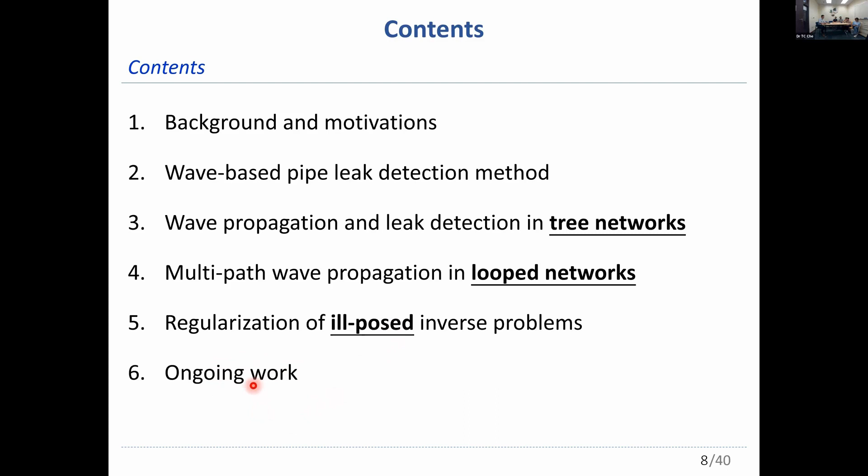Usually, in Hong Kong, the water pipes have been buried underground for several decades, or even more than 100 years. So aging is quite a severe problem of these water supply pipes.

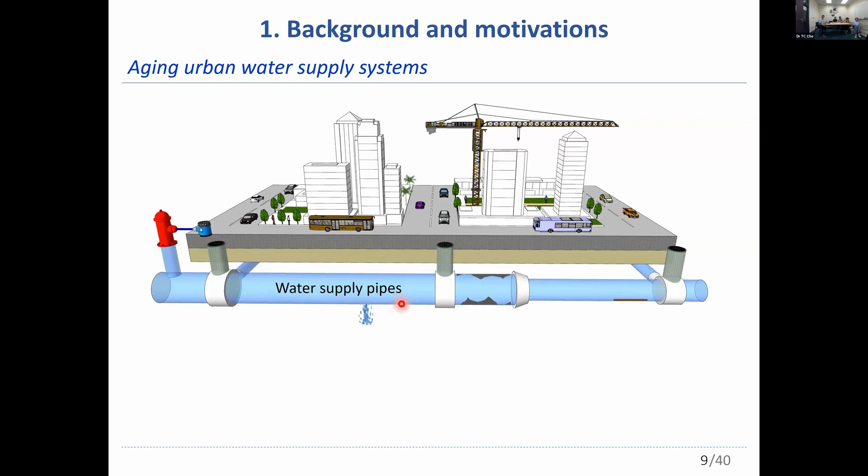So if we take a close look, they suffer from leaks. Each day, 30% of the water is lost from these leaking pipes. There's also deformation due to ground settlement, so our pipe may deform, and the shape of the cross-section area may change.

And also for the corrosion, especially for the metal pipes. And also, you can see here, we have blockages. But we focus more on the leaks.

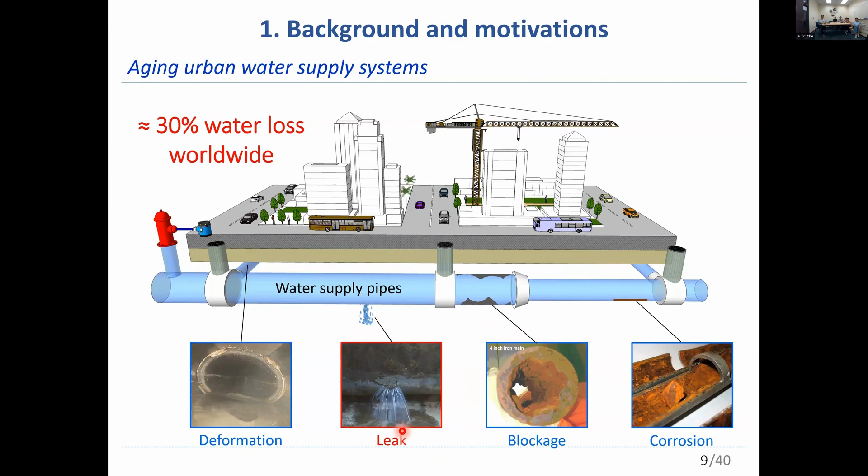Nowadays, there are many different methods for leak detection. A leak on the pipe can generate some hissing noise, like the sound.

So the idea of the listening stick is that the closer to the leak, the stronger noise will be heard by this guy, so that the leak can be localized when this guy hears a very strong noise. This is the idea of this listening stick. This method is very old, but very popular, because it is very easy to implement.

Actually, very similar for the smart ball. The smart ball is pretty much like a sensor that moves with the flow within the pipe. So you can see here, if we release the smart ball here, it can move with the flow and monitor the noise within the pipe.

So you can see here, the noise level is not that high. So when it reaches a leak here, you can see it has a very strong noise. Probably it moves forward. Here, some air bubbles also generate some noise, so you can see here the noise level is very high.

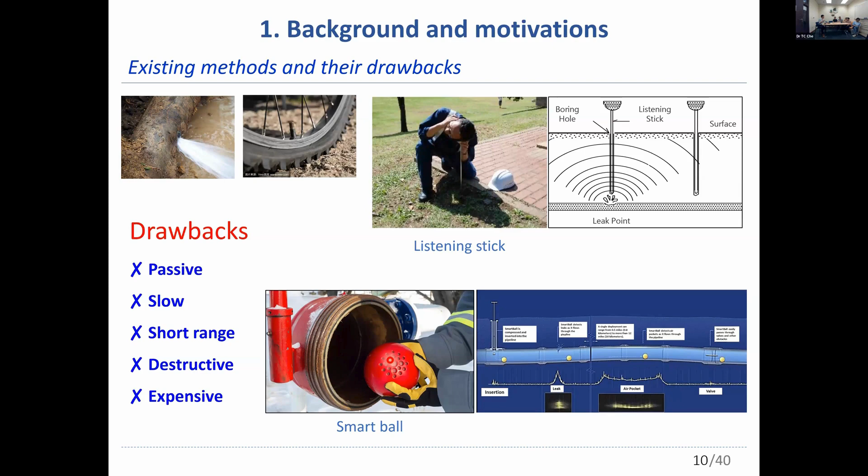So you know waves are all around us. You hear me because of acoustic waves, and our phone works with electromagnetic waves. In nature, animals are very smart, and if there is an unknown object like a moth during the night, or a fish in the deep ocean, they cannot see it, but they are very smart.

They usually send a wave, and they can get some reflection from these small animals. So they use the reflection waves to locate and identify the object. That's the idea. Probably I think here is an MP3. If you can hear, this is okay. Probably I need to change the pointer.

Here is the sound generated by this bat. You can see right here. This is a low frequency wave. This is a high frequency wave.

Actually, the animals are very smart. They generate waves at different frequencies. So you can see the sound generated by this dolphin for the low frequency wave. Higher frequency, even higher frequency.

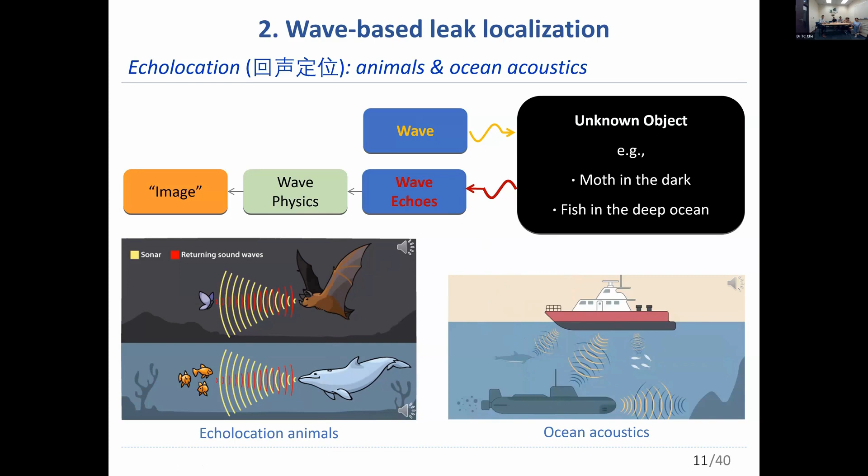That's the basic idea. The question is, can we do the same in pipe networks? The answer is yes, because we have the water hammer waves. Probably I can change the pointer here. Use a laser pointer, because we have the water hammer waves in our pipe system.

Actually, the water hammer wave is also one kind of acoustic wave. The wave speed is very high, it's like 1 kilometer per second.

So pretty much in this system, here is a reservoir. We transport the water to this valve by this pipe. If there is no leak in the pipe and we send a wave here, you can see the wave propagate and reflect at a boundary. We put a pressure sensor here to measure the pressure and we can measure this kind of signal. If we transfer this into the frequency domain, we get the frequency response function, and these are the resonant peaks of the system.

So if there is a leak, we still send a wave here. You can see the wave propagate and there will be additional reflections from the leak. We still measure here to get the time and frequency domain signals, and you can see it's very different from the no-leak case. Based on the measured signal, people develop different algorithms to find out where the leak is and how big it is. That's the general idea of this method.

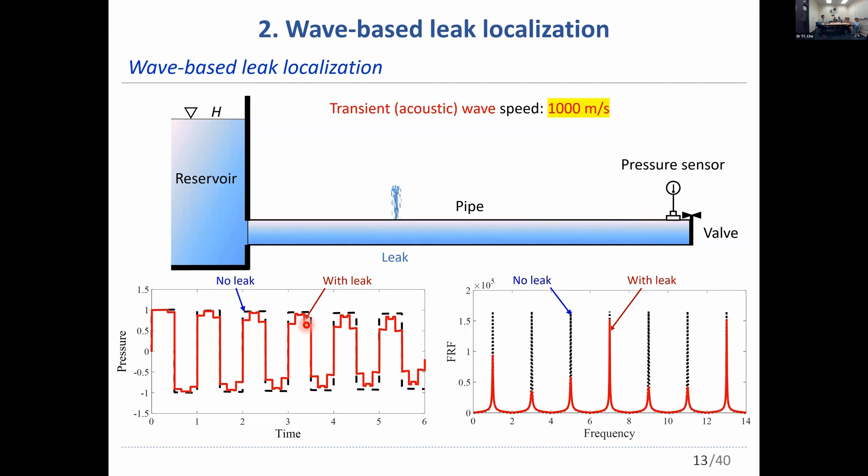Before getting into the technical issues, I wanted to talk about forward and inverse problems. Usually we have a model in our numerical simulation, and also in lab experiments we have a model. If we know the parameters of that model, we can get some data. That's the forward problem, because we know the model and the parameters, we can generate the data. The purpose is usually prediction or understanding the physical mechanisms of a process.

But usually sometimes we don't know the model parameters. Although we have the model, we don't know the parameters, but we have some observations. So if we know the model and we know the observed data, and the parameters are unknown, we want to determine the model parameters. This is the inverse problem.

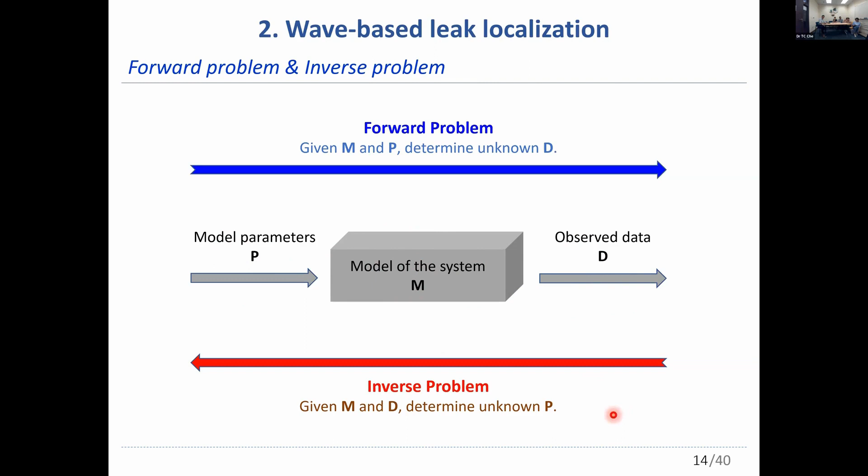I don't know if I can remove this guy here. Cannot. Okay.

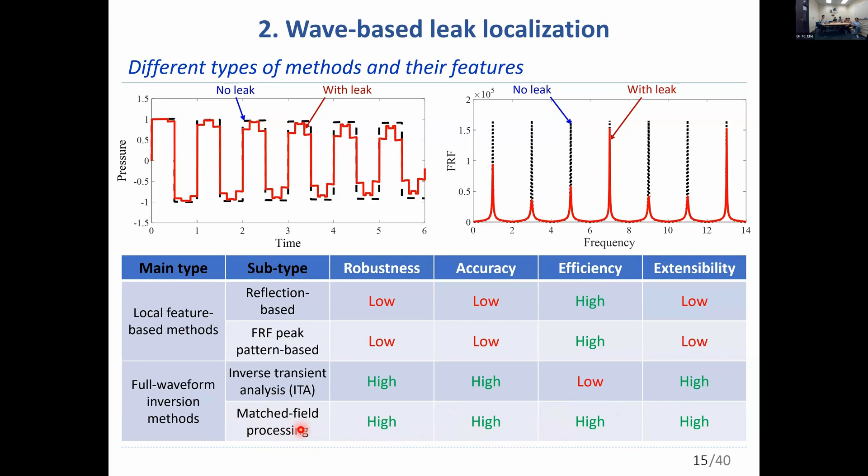It is a 2x2 matrix, and essentially they are mass and momentum equations in the frequency domain. So when we cross this leak, we also need the transfer matrix for the leak, and we can multiply the other matrix to move forward. Eventually we can represent any Q and H at any measurement location.

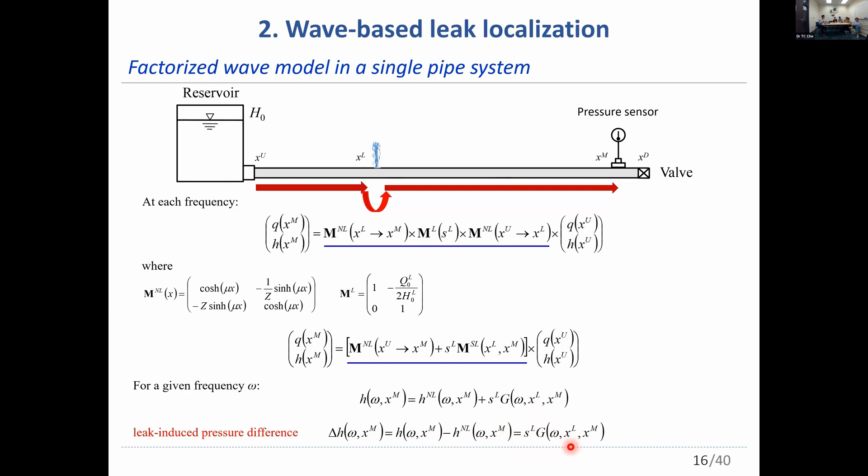I'll neglect some tedious procedures here. So finally you can see we get this leak-induced pressure difference, delta H. It equals the leak size, SL, times G. G is a function that depends on the leak location only. So you can see we separate the leak size and the leak location. We call it a factorized model, because the two unknown variables are separated.

So for the MFP here, if we write our model for all frequencies, it is in this vector form. You can see the delta H is the measured data, the measured signal, and this is our model. The SL is the unknown leak size, XL is the unknown leak location, and N here is the noise. So our objective is that usually we know the measured signal, but we don't know the leak size and the leak location. Our objective is to use this to determine or estimate the leak size and location.

Usually we use the MFP. Again, I'll neglect the tedious procedures here. So finally, because in the model they are separated, in the inverse problem we can estimate them separately. So first we find the location of the leak, and then we estimate how big it is. That's the general idea.

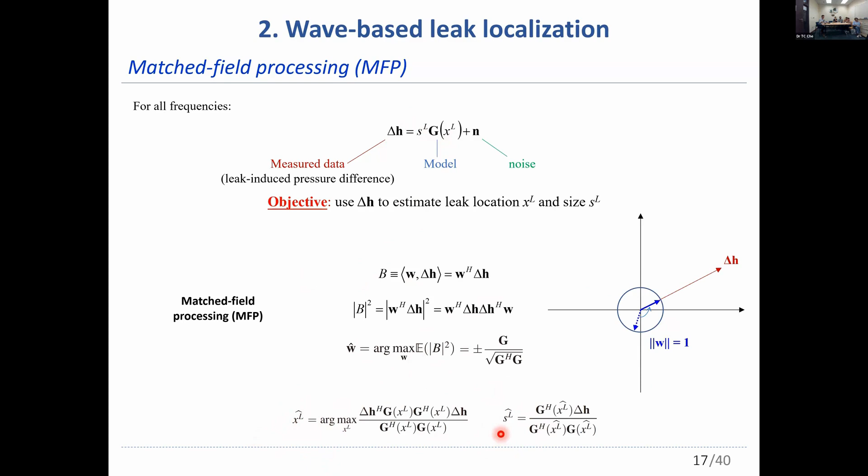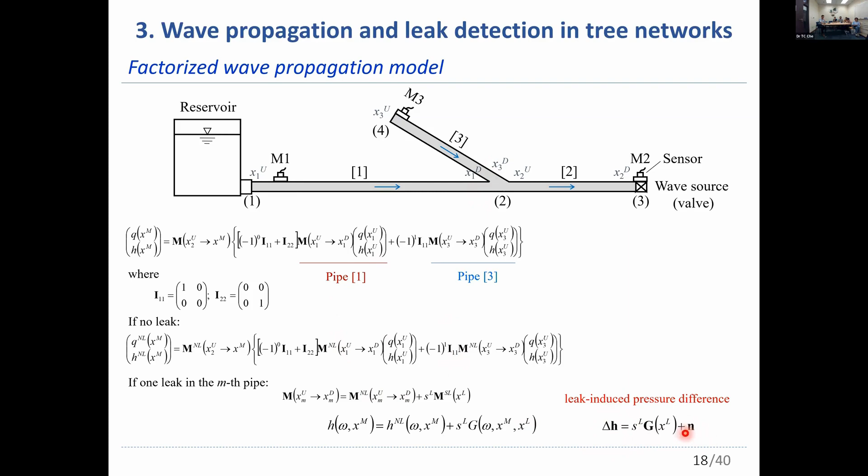So if we wanted to localize a leak in this network, we should know the boundary conditions. We should know the QH here and the QH here. That means we need to put sensors here and here. But the pipes are all underground, and probably sometimes we cannot access this pipe. So at this time, if we cannot put a sensor here, then this method doesn't work.

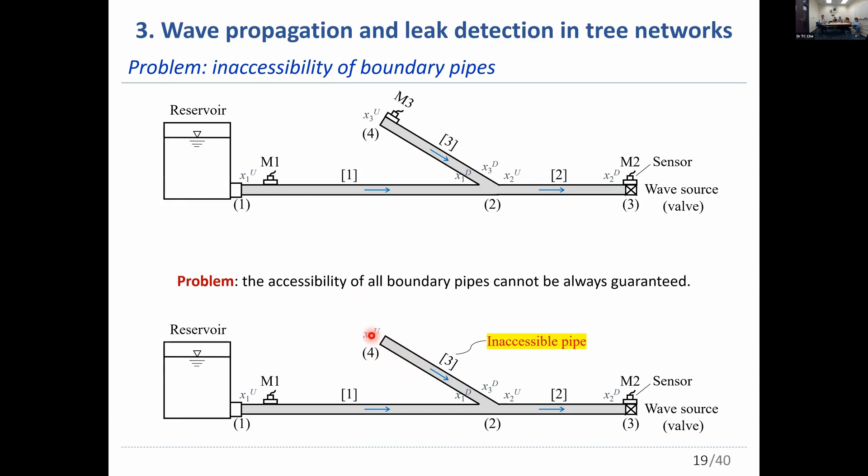So if we cannot access this pipe, then this method doesn't work. So then we modify the model. One key procedure is here. I neglect some procedures here.

That simplification is based on the small leak approximation. If we assume the leak size is very small, we can neglect this term. In this way, we derived a point matrix for this pipe, and actually we lumped all the information of this pipe into a point here. So when we cross this point, there is no need to measure the QH here, we just cross this point.

This is a point matrix. Initially it was a field matrix for this pipe, but now we derived a point matrix. So you may ask, how good is this small leak approximation?

Actually we did some numerical tests for different sizes of leaks. This one is for a small leak, this one is for a medium leak, this is for a larger leak. You can see compared with the transfer matrix, our linearized model, they agree very well.

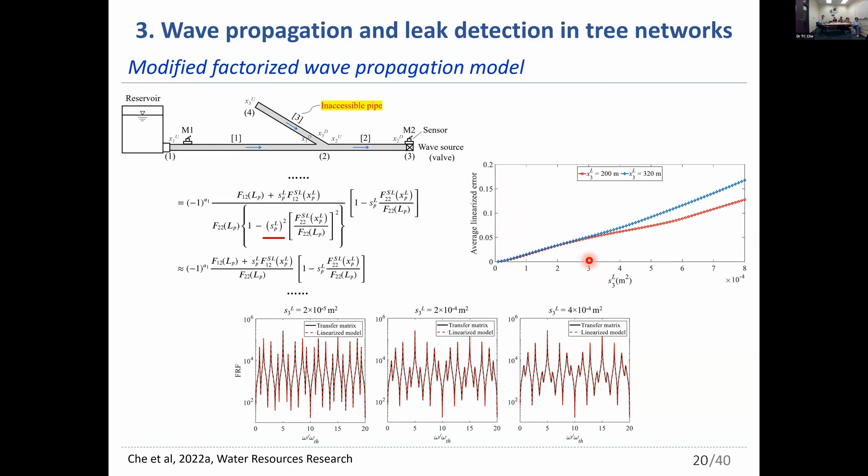And then we do some numerical tests. In this numerical test, you can see here is a reservoir. It supplies water to the valve here. We cannot access this pipe, so we cannot put the sensor here. So now we only need two sensors, this sensor and this sensor.

And also we test multiple leaks. If we put 2 leaks into the pipe, but the multiple leak is only in the data, and in the model we only have 1 leak, because we found that the total leak induced pressure difference is the summation of all individual leaks. So we can do this.

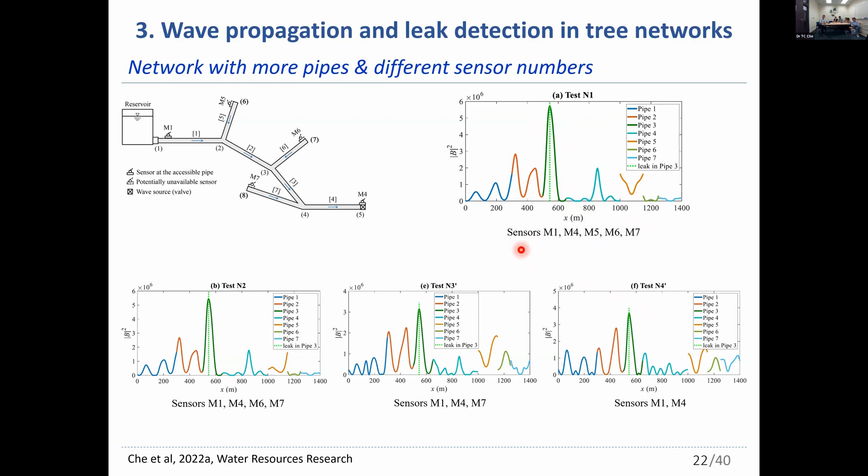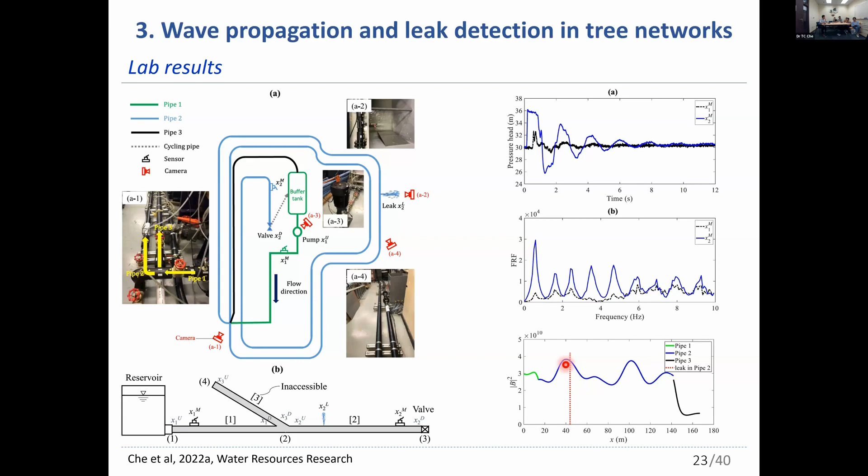So if I remember correctly, we cut here, we only use the first like 5.5 hertz. So here is the detected result. The dashed line is the real leak location, and our maximum objective function is here. The error is pretty much like 5 meters.

And the second topic is the wave propagation and the leak detection in this kind of loop network. And for the loop, we have this kind of structure.

As we mentioned before, in the tree network, there is a unique path between any boundary to the wave source. But if you look at this loop network, here is the boundary, here is the source. From the boundary to the source, you can see here we have more than one path. So the wave path is not unique.

There is a good point for this feature, because for water supply, if you think of it, probably for the tree network, if any one of the pipes is broken, we cannot get water here. And also if pipe 2 is broken, we cannot get water here. But for the loop network, if pipe 2 is broken, the flow can still go this way, and we can get water here. So this kind of loop structure is good for the service of water users, but it's not good for the wave propagation.

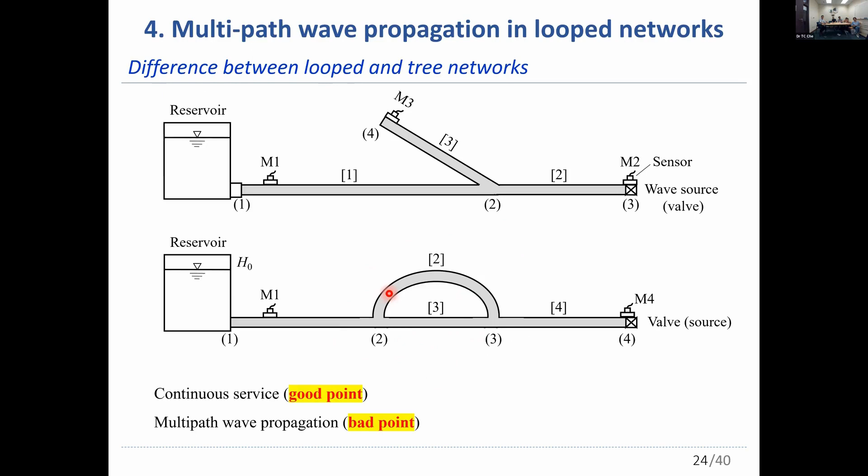Because you can see there are multiple wave paths between different nodes, this makes the wave propagation between different nodes very complicated. So it's difficult for us to separate the 2 unknowns, the leak size and the leak location, in this kind of loop network. So that's the problem.

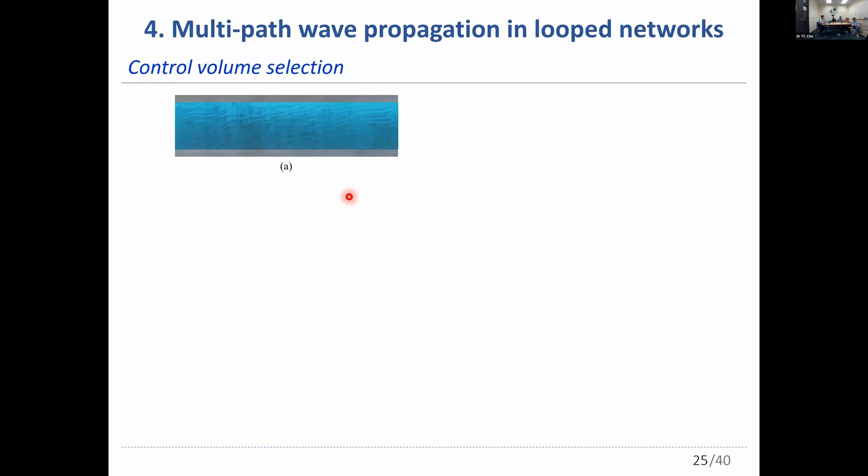So in fluid mechanics problems, usually if we want to study a problem, we need to select the control volume. I think the control volume is pretty much like the numerical mesh you draw in your numerical model. So for a pipe problem, how should we select the control volume? Probably we can select it in this way, we can select this one as our control volume.

We include the water. Probably we can choose a larger control volume to include also the pipe wall. Probably even larger to include the soil outside. Probably we can draw some small meshes here. So for the pipe problem, which volume should we choose? Do you have your answer?

The answer is it depends. It depends on your problem, and it depends on your purpose. If our purpose is to study the 1D pipe flow, we will choose control volume A. If we want to study the fluid structure interaction, B is the best one. If we want to study the fluid structure and the soil interaction, we should choose the third one. And if we want to study 2D flows, we should choose our control volume in this way.

So you can see the selection of the control volume is very flexible. The main purpose is to simplify the problem. If we want to focus on the pipe flow inside the pipe but choose the wrong kind of control volume, the problem will become very complicated.

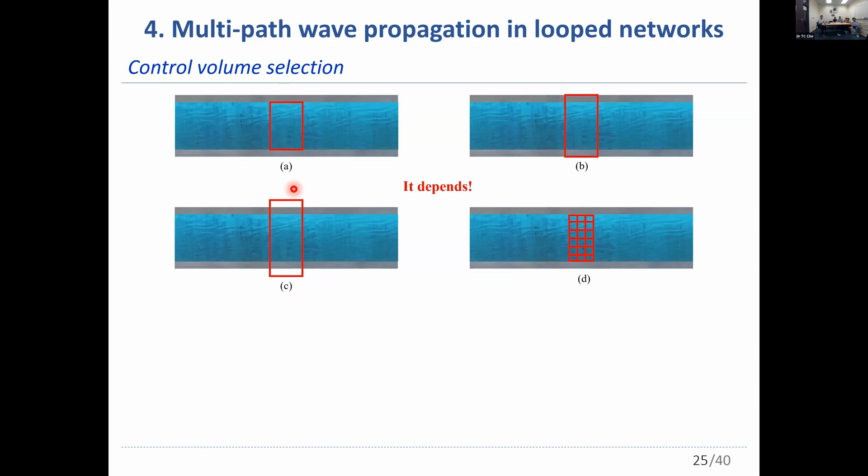Similarly here, for this kind of loop structure, usually people choose this kind of control volume. If we choose this kind of control volume from the boundary to the wave source, there are multiple wave paths, which makes the problem very complicated.

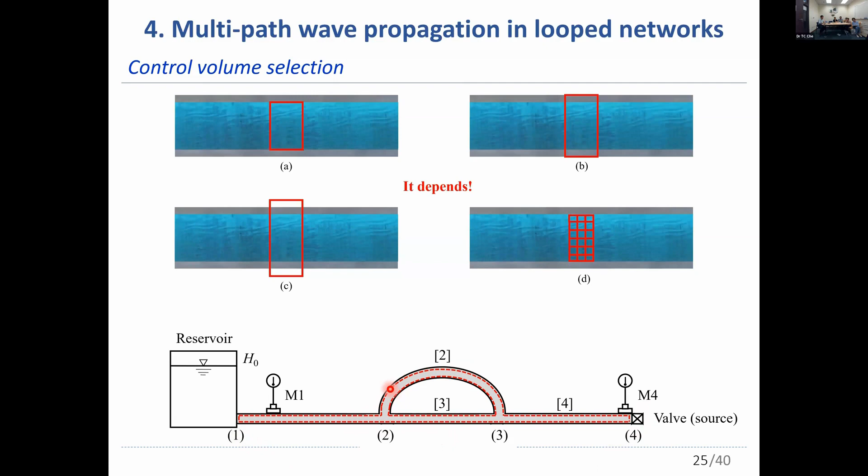So can we choose the control volume in this way? Here we put two control surfaces, like S1 and S2. If we put two control surfaces here, actually the loop structure is broken. It becomes like a tree network. Here we have a boundary, here we have a boundary, here we have a boundary. We no longer have the loop network, as if the loop network has been transferred into a tree network.

So our previous theories and models can be used here. But if we want to put a control surface here, we should know the QH here, because it's a boundary, we should know its property.

There are two methods to do this. The first method is we can put sensors here to measure the QH. But the efficiency is quite low, especially for larger networks. We cannot do it this way.

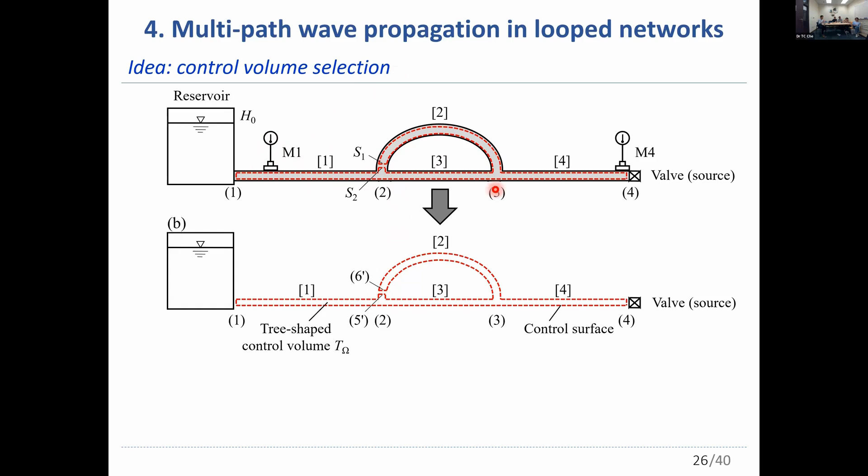The second method is we can compute it. Probably we have some boundary measurement, and based on the boundary measurement, we can compute the QH at every node. That's the idea. Actually, that's what we did.

Usually, for this kind of loop network, if we know the location of this leak, now we want to compute the QH at every node, and the number of pipes is M. So you can see in every pipe, there are 4 unknowns, 2 upstream, 2 downstream. So the total number of unknowns is 4M.

So how many equations do we have? We have the mass momentum equation for each pipe, the mass momentum equation for the junction, and also the boundary conditions. If we sum all these equations, it's 4M. So the number of equations equals the number of unknowns. We just write all the 4M equations in this way.

It is AX equals B. The unknown hydraulic properties are in X, so we can very easily compute X. So here we know the QH at any point, which means we can choose a control surface here.

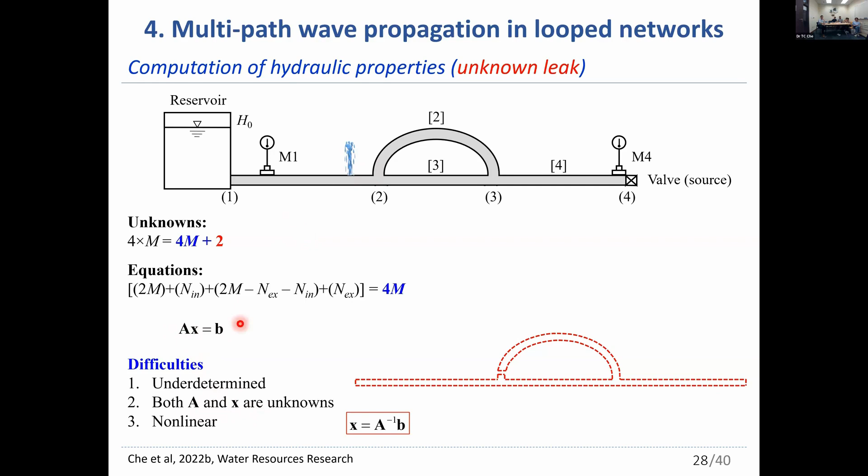And because the leak location is unknown, and it involves sine and cosine functions, it is in A, so it's nonlinear. With these difficulties, it's impossible for us to solve this problem. So our idea is that we don't want this equation, we don't want the mass and momentum equation for that leaky pipe.

Instead, we measure - initially we have one boundary condition here and one here, but now we put sensors here to measure one more boundary condition and put it into our equation. So now we have 4m unknowns and 4m equations. Only x is unknown, and it becomes linear, so we can easily compute the hydraulic properties at every node.

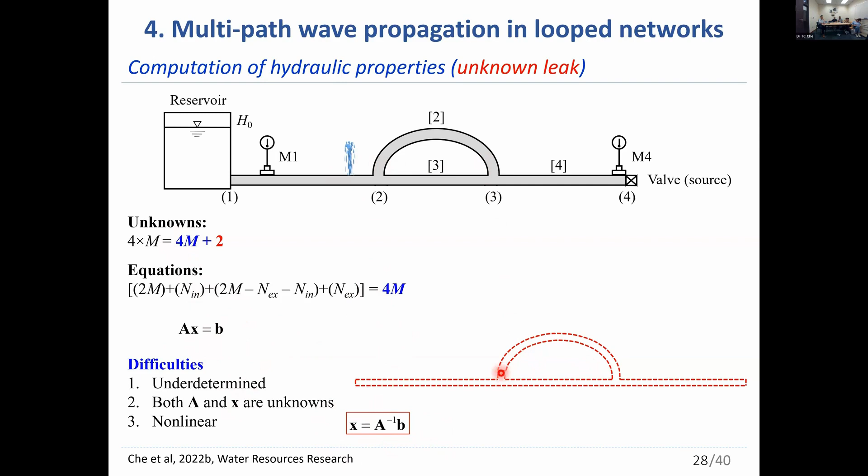So you can see here, now we can break this loop structure and treat it as a tree network. Here for this loop network, here is the reservoir, a loop network. We send the wave here.

Now we put two sensors here and here. You can see when the leak is in pipe 1, the vertical dashed line is the real leak location, and the curves are objective functions - actually the mismatch between the model and the data. You can see it is minimum at the real location. And also for other locations, if the leak is in pipe 2, we can find it out. And also for pipe 3, we can find it out. Also for pipe 4.

But now we didn't put noise here - this is a noise-free case, because there is inverse computation. The matrix inversion, we found, is an ill-conditioned problem. I will talk about it later on.

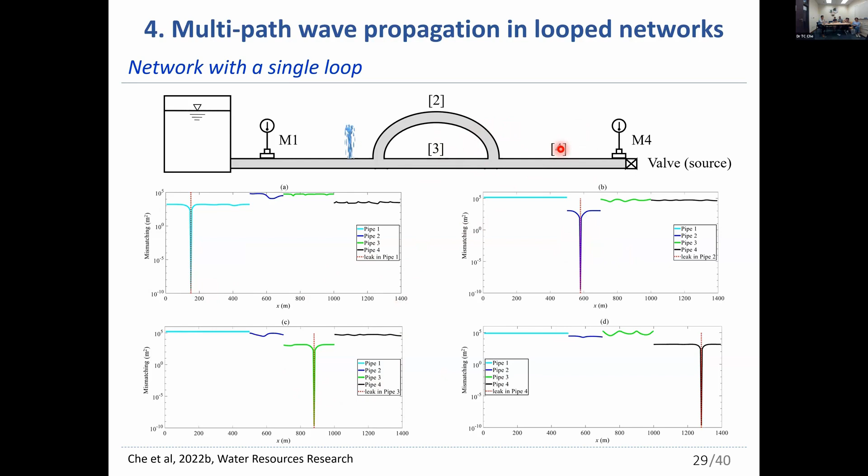We also apply this method with multiple loops. Once we have the boundary measurement, we can compute the QH, the hydraulic properties, at every internal node. You can see we break the loop here, and also here, so the loop network becomes a tree network. That's very easy to deal with.

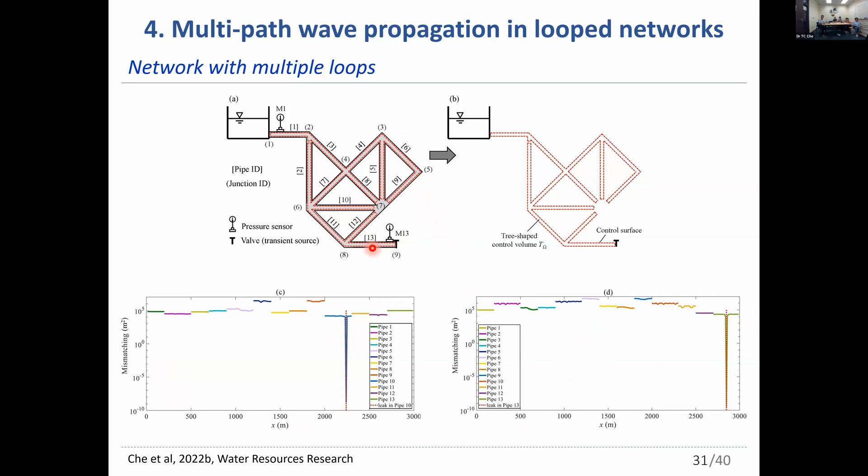As I mentioned, because we need to use the boundary measurement to inversely compute the hydraulic properties, there is a matrix inversion. For the matrix inversion, probably the determinant of the matrix is very, very small, so it becomes an ill-posed problem.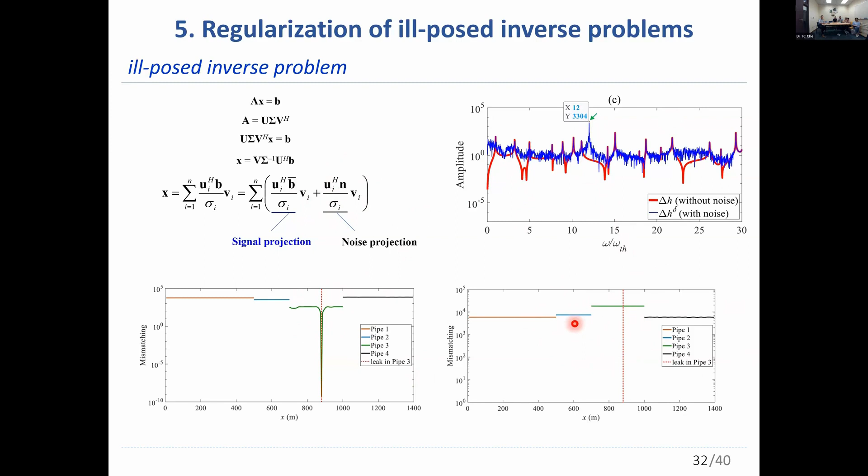So if we use the blue curve to localize the leak, you can see here this is the result - we can only search out a wrong solution. If there is no noise, that's the red curve, we can find it out. But if there is noise, the noise is amplified here, and we cannot accurately localize the leak.

To solve the ill-posed problem, people usually use the Tikhonov method to regularize it. I think the Tikhonov method is also popular in machine learning to avoid overfitting.

But there is a very important assumption for the Tikhonov method: the discrete Picard condition. It says that this coefficient should decay to 0 faster than the singular values, like here.

Here's an example. You can see the blue circles are the singular values, and you can see it decreases to a very small number, very close to 0. The green one is the coefficient upstairs.

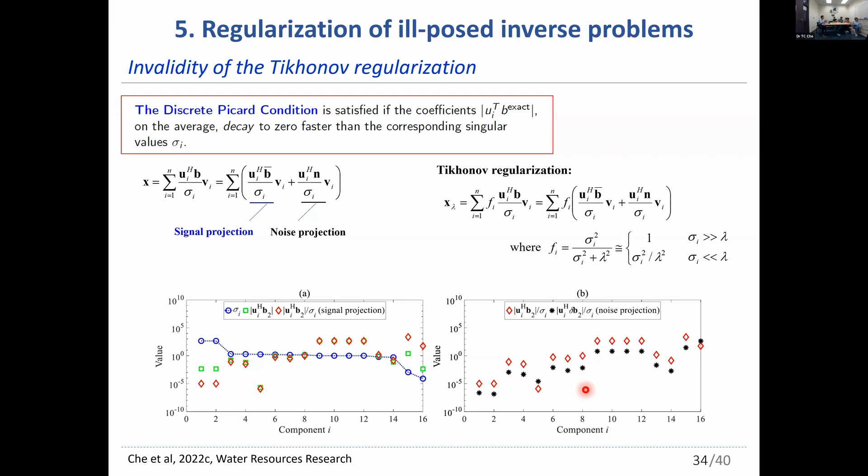If we know this theoretical upper bound, we can determine a threshold. If the upper bound is larger than this threshold, we can tell it's an ill-posed frequency. If the upper bound of the noise is lower than this threshold, we can tell it's a well-posed frequency, and we should use that frequency for our detection.

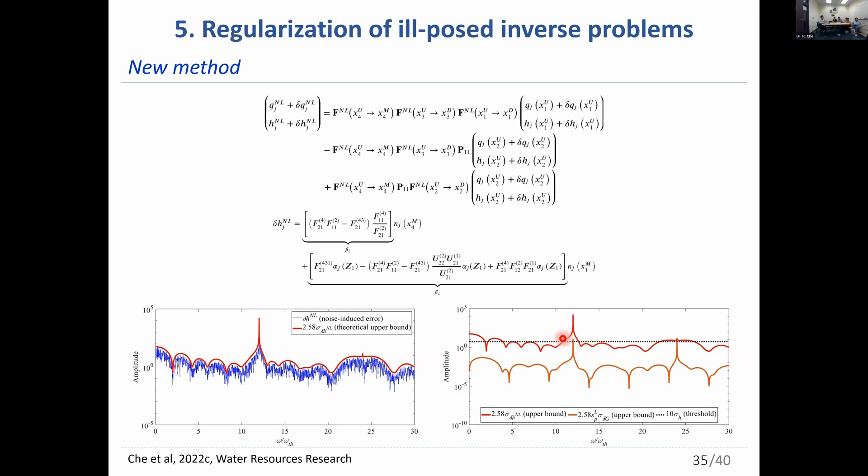That's the general idea here, because we use matched field processing, which makes use of the whole frequency domain instead of a single frequency. So we can neglect some ill-posed frequencies.

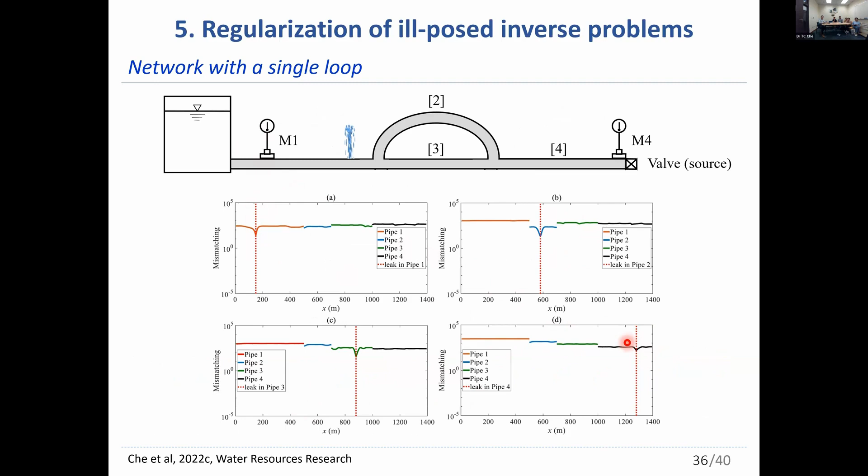So you can see here, we test our scheme in this network. Here we put noise, with an SNR of 10. You can see if the leak is in pipe 1, pipe 2, pipe 3, or pipe 4, we can localize them, and we also tested it in this larger loop network.

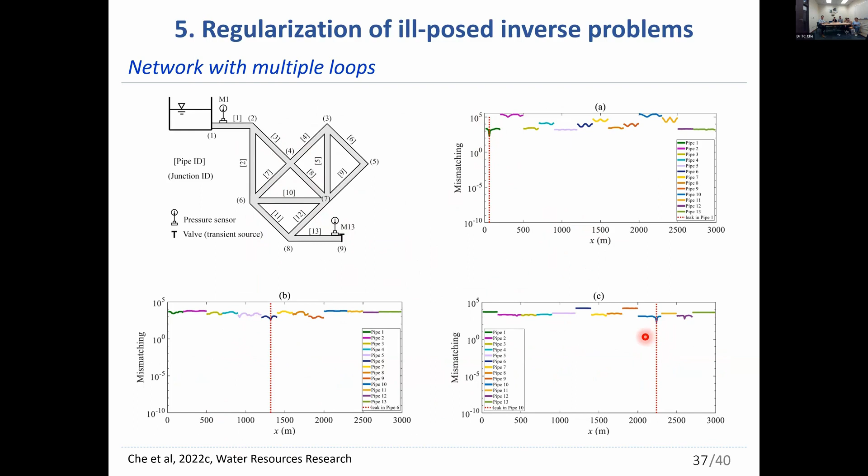You can see we can localize the leak successfully, even with noise present. And this next part is our ongoing work.

Although this method has been developed for like 20 or 25 years, and the theory has been very well established and validated in the lab, when we go to the field, we cannot find the leak because there are lots of uncertainties there.

Initially, we may think the pipe is an artificial structure, unlike weather prediction or groundwater flows, so there wouldn't be many uncertainties. But in pipe flows, there are actually lots of uncertainties. That's why we cannot deal with this problem using the traditional deterministic model.

So now we are working on data assimilation, and we wanted to combine the data and our traditional model based on the Bayesian theorem to improve the accuracy in the field test. Hopefully we will bridge this gap in the near future.

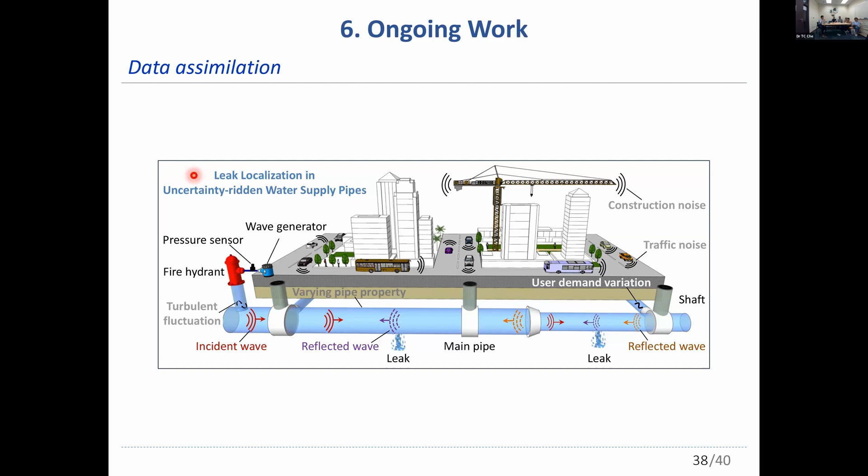Last but not least, I would like to thank our colleagues, the co-authors, like Professor H.F. Duan in PolyU, Professor Xun Wang in Beihang University, Professor Ghidaoui and Luati in HKUST, and Professor Ling Zhou in Hohai University. Our research is supported by the NSFC and the Hong Kong Research Grants Council.

This is only a very brief introduction of our work, so you can read our papers for more details, or you can contact me by WeChat or email. I'm very happy to answer any questions. Thank you very much.